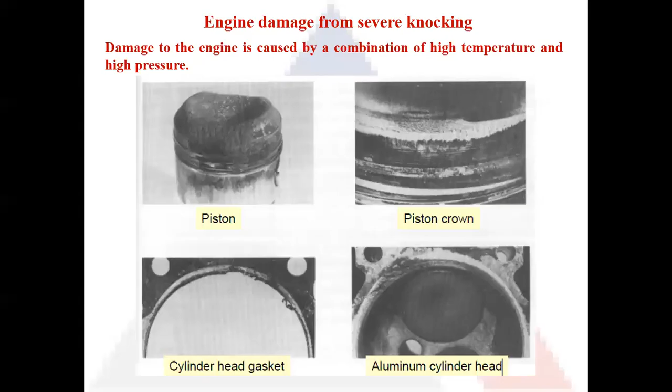In the previous lecture we started with IC engines, that is internal combustion engines, and the last topic we covered was the knocking that takes place inside the engine and the factors that cause knocking. In today's lecture, we will start with the various ratings of IC engine fuel, and then we will go through anti-knocking agents, what agents are added to prevent knocking inside an IC engine.

Then we will also cover what is supercharging, and why there is a need for supercharging in IC engines. And the last topic will be the various pollutants that come out of the exhaust of the IC engine, and how they affect the environment and the human body. Okay, so that is the lecture for today in IC engines.

The first topic, the rating of IC engine fuel, will start with the octane number. Octane number is a numeric fuel rating that is given to petrol or gasoline. Octane number is associated with SI engines. So it is the rating given to the petrol or gasoline that we use in our automobiles. Now, the resistance to knocking is the most important characteristic of a fuel, and the ability to resist knocking depends upon the chemical composition of the fuel.

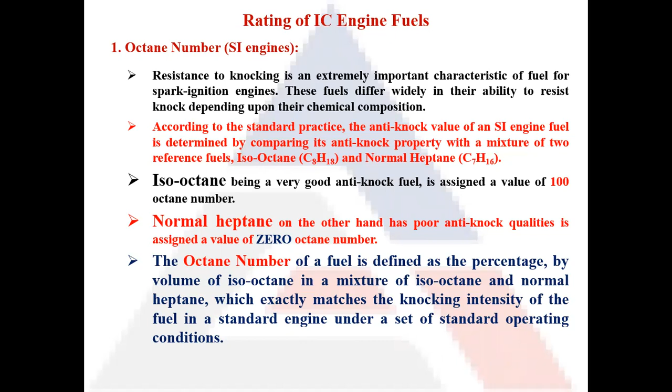Similarly, on this basis, we define cetane number. Cetane number defines the anti-knocking properties of a diesel fuel. In this case, the reference fuels used are normal cetane, that is C16H34, and alpha methyl naphthalene, C11H10. Normal cetane, being a good anti-knocking agent, is given a value of 100, and alpha methyl naphthalene, because it is a poor anti-knocking agent, is given value 0.

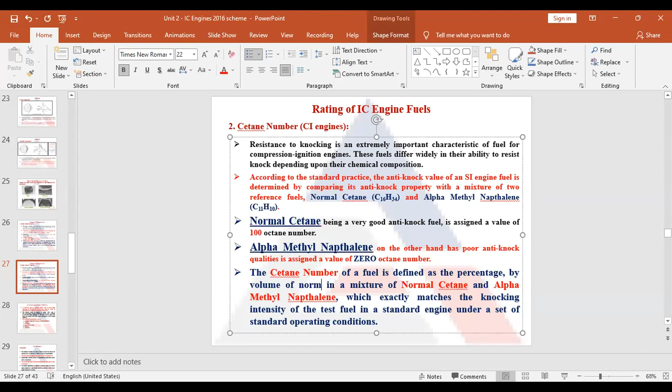Similarly, for the sample fuel, the cetane number is defined as the percentage by volume of normal cetane present in the reference mixture of normal cetane and alpha methyl naphthalene. So here it should be normal cetane; it's the value of normal cetane.

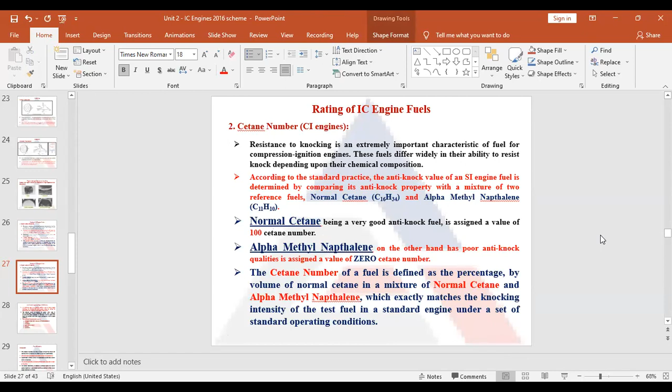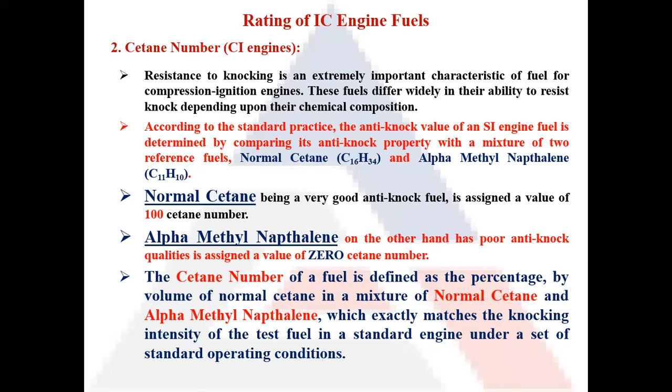So this is how cetane number is defined. So here the reference fuels change. Normal cetane has a good anti-knocking value, hence it is given as 100 cetane number. And on the other hand, alpha methyl naphthalene has poor anti-knocking qualities, so it is given as 0. So in a sample of reference fuel, the percentage of normal cetane defines the cetane number for a sample fuel.

Okay. Next is what is an anti-knocking agent. They are also known as dopes or inhibitors. Now, anti-knocking agents are used in gasoline as additives. They help in reducing the engine knock, or they enhance the anti-knocking properties of the fuel by increasing the fuel's octane value or octane number.

Now, the mixture known as gasoline or petrol, when used in high compression IC engines, has a tendency to knock. Obviously, if you use petrol in a high compression ratio engine, pre-ignition will always be there, because the heat produced during compression will be more, because the compression ratio is more. So that will start the pre-ignition process, or auto ignition process also. So that may cause the tendency of the fuel to knock.

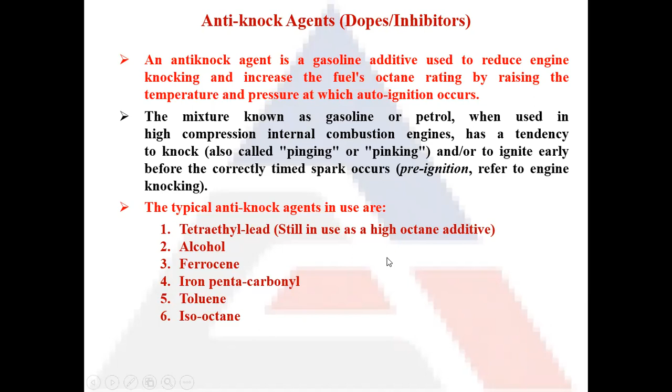So by adding these anti-knocking agents, we can enhance the anti-knocking properties by increasing the temperature of auto ignition of the fuel. Typical anti-knocking agents used are tetraethyl lead, alcohol, ferrocene, iron pentacarbonyl, toluene, and isooctane. So these are the anti-knocking agents that can be added to petrol to increase its anti-knocking properties.

Next is what is supercharging. Supercharging is the process of increasing the density of air by compressing the air before it enters the combustion chamber during the suction stroke. So before the air enters the combustion chamber, we compress the atmospheric air. By compressing it, we increase the mass of air per unit volume. So the density of air increases.

Now, with the increase in air density, the number of oxygen molecules also increases. So air in the same volume, when it is compressed, will have more oxygen molecules. More oxygen molecules means I can burn more fuel. Now, there is a need of supercharging when I am running my automobile at a very high speed.

Now, at a very high speed, or when I am accelerating, I need a richer mix. That is, I need more fuel to burn. The more fuel there is, the more is the requirement for oxygen also. So according to the minimum oxygen required for complete combustion, if the fuel increases, the amount of oxygen required for complete combustion should also increase.

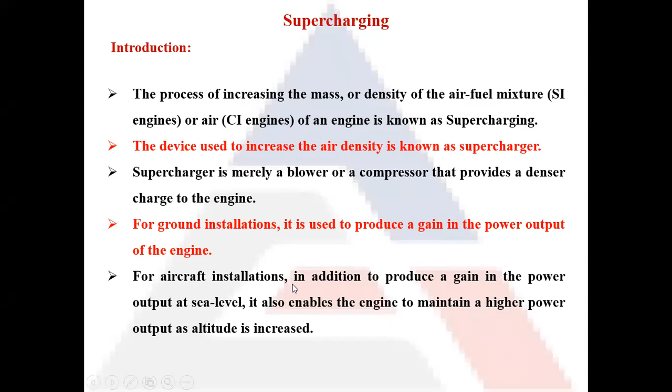So in this case, a supercharger is required. A supercharger compresses the air and makes it dense, and in the same volume we can have more oxygen. Okay, so this is the function of a supercharger. Now, various types of superchargers are available.

There is a vane type supercharger. Air comes in from the inlet port. It gets trapped between two vanes, and as this rotor moves, the air gets partly compressed because of decrease in volume, and partly compressed from the backflow. So there is the vane type compressor. Then there is the centrifugal type compressor,

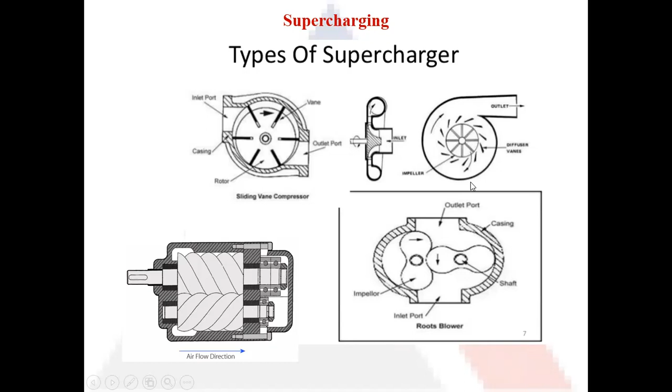and this is your lobe compressor, also known as Lysholm compressor or screw compressor at the bottom left, and then this is your roots blower. So these are all the types of compressors that are used in automobiles for supercharging or compressing the air.

Now, in modern vehicles, another type of charging that is done is a turbocharger. Here we can see the diagram of a turbocharger.

Now a turbocharger has two components installed on the same shaft. We have a compressor and we have a turbine. So what happens here, this is the engine. From the engine, the exhaust comes out at a higher velocity and a higher energy, and it strikes the blades of the turbine, and it starts to rotate the turbine.

Now this turbine, because it is attached on the common shaft, rotates the compressor blades also. As the compressor blades rotate, the atmospheric or ambient air starts to enter the compressor, and when it enters the compressor, this air gets compressed. Because the air is getting compressed, the temperature of air increases.

Now we need to decrease the temperature of air before it enters the combustion chamber. So we have an air cooler in between that decreases the temperature of the compressed air. This compressed air, after cooling, enters the combustion chamber for the combustion process.

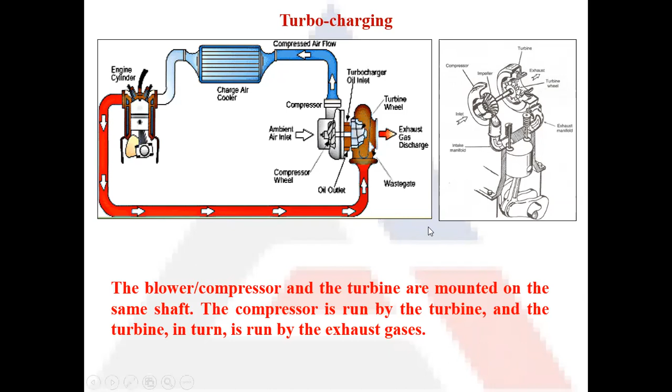Now, in the next topic, we will discuss the various emissions and pollutions that are associated with automobiles. For atmospheric pollution or air pollution, we can have two sources: stationary sources and mobile sources. Stationary sources can be the combustion of fuel in factories, or the burning of fuel and coal in thermal power plants.

From forest fires there can be pollution. Also from the various types of solvents and aerosols that we use, like deodorants, paints, and perfumes. All these have aerosols and solvents that go into the atmosphere, and they pollute the atmosphere.

Now, from the mobile sources, we have the vehicles or automobiles that run on the highways. Cars, trucks, buses, motorbikes, all these are causes of pollution. Other causes of pollution can be aircraft, boats, locomotives, farm equipment, construction machinery, and lawn mowers. All these burn fuel to produce energy, and the byproduct is the air pollution that goes into the atmosphere.

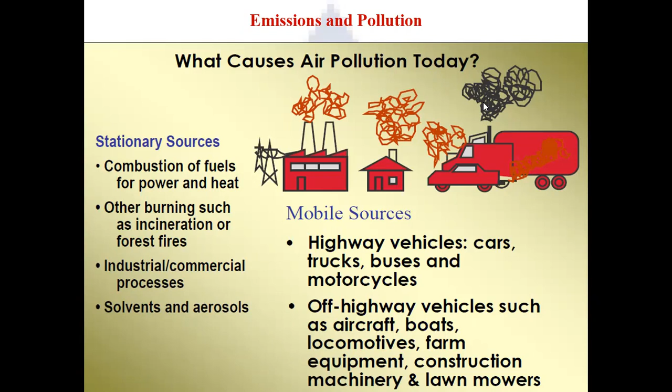Now, the primary types of air pollutants that come out of a vehicle are carbon monoxide, volatile organic compounds, oxides of nitrogen, sulfur dioxide, particulate matter, and lead. These are the major pollutants from vehicles.

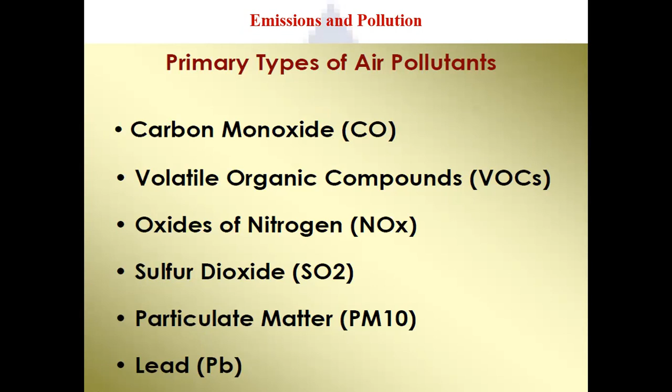Carbon monoxide is an odorless and colorless gas. It is formed during the incomplete combustion of fuel. When the fuel does not have the required amount of oxygen for combustion, the carbon does not form carbon dioxide, but instead forms carbon monoxide. Most of it comes from motor vehicles.

The ill effects are that it reduces the transport of oxygen through the bloodstream. It affects your mental functions and visual acuity even at low levels, so it affects your eyesight and your mental functions. Improvements are being made, but there are still problems in urban areas. Metropolitan cities and urban areas still have the problem.

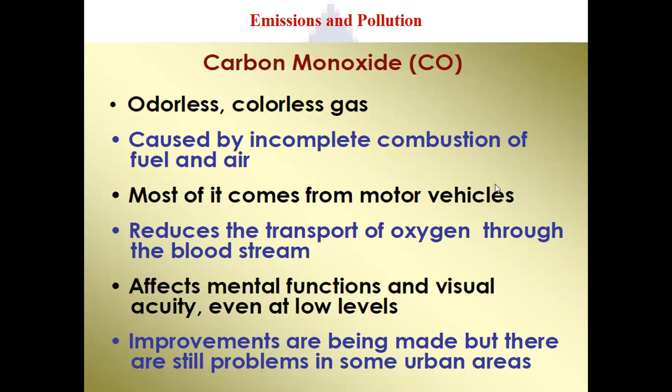The governments and the research and development wings are coming up with solutions, but still, because the number of vehicles on roads in metropolitan cities is very high, carbon monoxide is still a problem. Then come volatile organic compounds.

If you keep these volatile organic compounds open in the atmosphere, they form fumes and evaporate by themselves without heating them or giving them any energy from outside. Volatile organic compounds result from the combustion process and evaporation of gasoline vapors or solvents. They contribute to global warming.

In sunlight, they combine with nitrogen oxide to form ozone or smog. Ozone irritates your eyes, aggravates respiratory ills, and also damages crops. The ozone problem is the one that is affecting most people today.

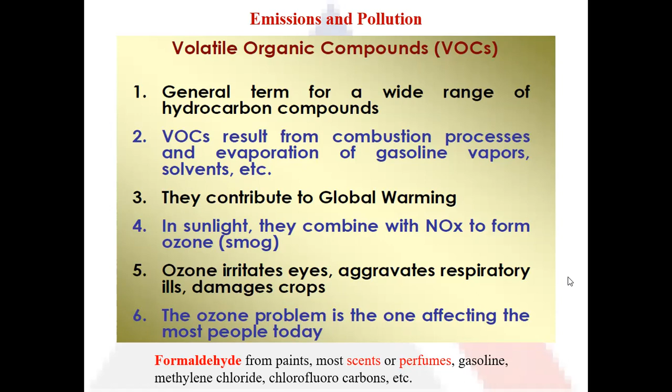Another volatile organic compound is formaldehyde. It comes from paints, most scents and perfumes, gasoline, methylene chloride, and chlorofluorocarbons. So formaldehyde is the major volatile organic compound that comes from all these sources, and it is again causing health issues.

Next is oxides of nitrogen. Now nitrogen dioxide is the prominent one. It is yellow brown color in the smog. Okay, smog is what? Fog plus smoke. Smoke plus fog, the term is smog. Okay. Now in many metropolitan cities, you might have seen brown fog in the air. Now this brown fog is nothing but the yellow brown, that is nitrogen dioxide mixed in the fog.

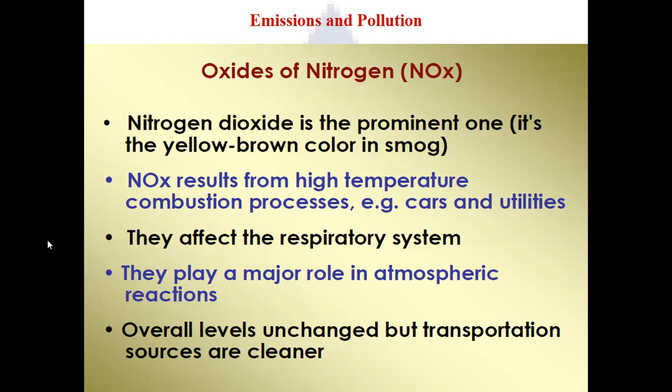So nitrogen oxides result from high temperature combustion processes in cars and utilities. Now what they do is they affect the respiratory system. They play a major role in atmospheric reactions also.

Next is lead. Lead is the worst toxic. It comes mainly from gasoline, that is petrol, plus battery factories and non-ferrous smelters. It affects various organs and causes sterility and neurological impairment. For example, retardation and behavioral disorders. So this is what lead can cause. Infants and children are especially susceptible.

So new laws are coming up. So we are now getting lead-free petrol. Okay, so we have lead-free petrol, but still there is a very negligible or small amount of lead inside the petrol that we are getting. So we have been exceptionally successful in controlling this lead pollution to a great extent.

Then the particulate matter. So there are different sizes. So here PM10 is there. 10 means the size of the particle is less than 10 micrometers. Nowadays, another type of particulate matter that is there is PM2.5. Okay, so the size of the particles is less than 2.5 micrometers. So that is now causing major pollution.

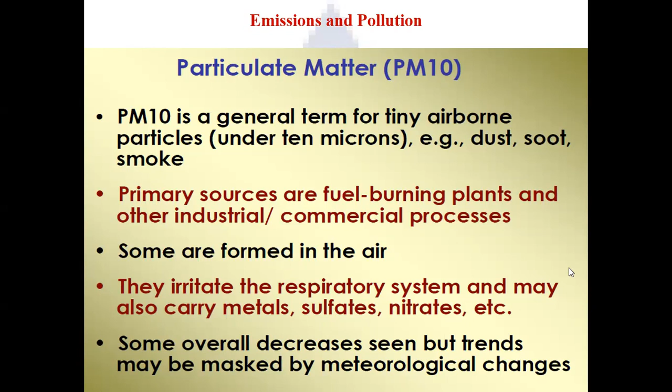These irritate the respiratory system, and they might also carry metals and sulfates and nitrates in them. So that is your particulate matter that gets suspended inside the atmosphere.

Then sulfur dioxide. Primarily it is caused by burning of coal, oil, and various industrial processes. It also affects the respiratory system. This reacts with the atmosphere and it forms acids and sulfates. So sulfur dioxide is the major reason for acid rains. We have heard of acid rains. And this is the cause of acid rain, that is the amount of sulfur dioxide in the atmosphere.

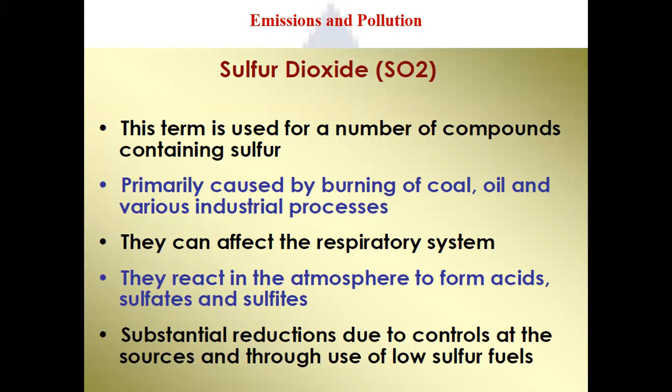So in the new norms, that is Bharat Stage 6, BS6, there is a major control on the amount of sulfur in your petrol and diesel fuels. Okay. So in petrol, it is being reduced from 50 parts per million to 10 parts per million. And in diesel, it is being reduced from 50 parts per million to 10 parts per million. So that will significantly reduce the levels of sulfur dioxide in the atmosphere.

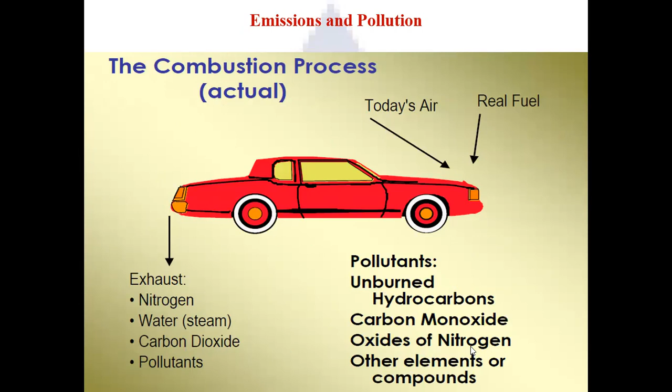So next is, what is a catalytic converter? Now what happens here is the fuel and air go in from the front of the car, and at the back of the car, what we get is pollutants, that is unburnt hydrocarbons, carbon monoxide, oxides of nitrogen, and other pollutants. Now, a catalytic converter is a device that uses a catalyst, and it converts the harmful compounds that come out from the exhaust of the car into less harmful compounds.

Now, the three major harmful compounds that are checked by this catalytic converter are hydrocarbons, that come from unburnt fuel, carbon monoxide that comes from incomplete combustion of fuel, and nitrogen oxides. At very high temperatures, nitrogen reacts with oxygen to form nitrogen oxides.

Now, the catalytic converter has a honeycomb structure in it, and that honeycomb structure has platinum and palladium inside. Okay, and it is coated. This platinum and palladium is coated. There is a small thin coating that is done on the ceramic honeycomb structure. Okay, inside the muffler.

So when hydrocarbons come in contact with palladium and platinum, there is a chemical reaction that takes place that converts carbon into carbon dioxide and hydrogen into water. Carbon monoxide reacts to form carbon dioxide, and nitrogen oxides react to form nitrogen and oxygen. Okay. So that is the function of the catalytic converter.

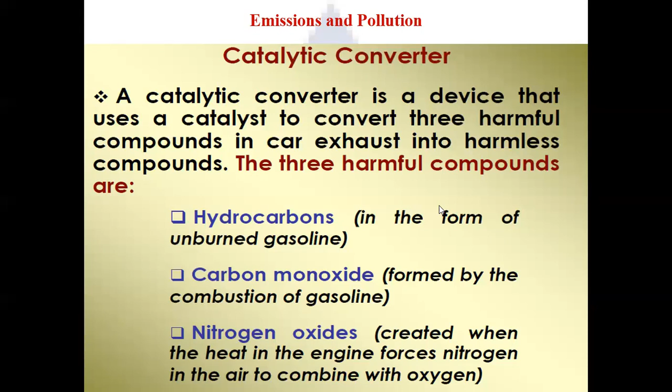So the catalytic converter converts hydrocarbons into carbon dioxide and water, carbon monoxide into carbon dioxide, and nitrogen oxides into nitrogen and oxygen. So harmful compounds are converted inside the catalytic converter into less harmful compounds. So that is the function of a catalytic converter.

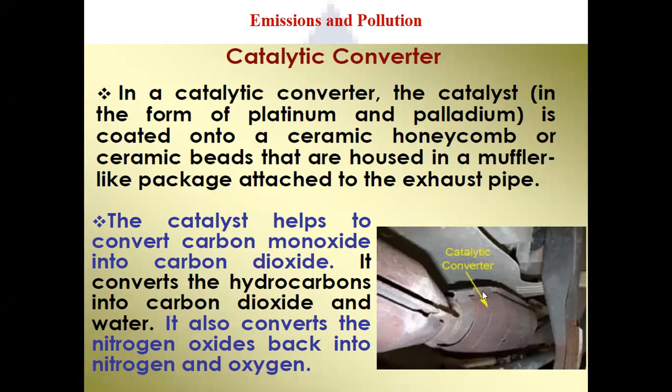Now this catalytic converter is connected between the engine and the mufflers, and it is attached beneath your vehicle. So this is your catalytic converter. So this is all from the IC engine part.